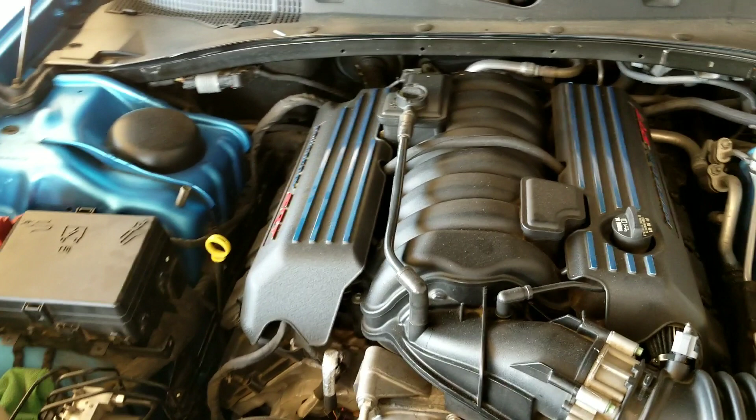Alright, so we're back at the house. Sorry, my engine's a little dirty, haven't had time to clean it.

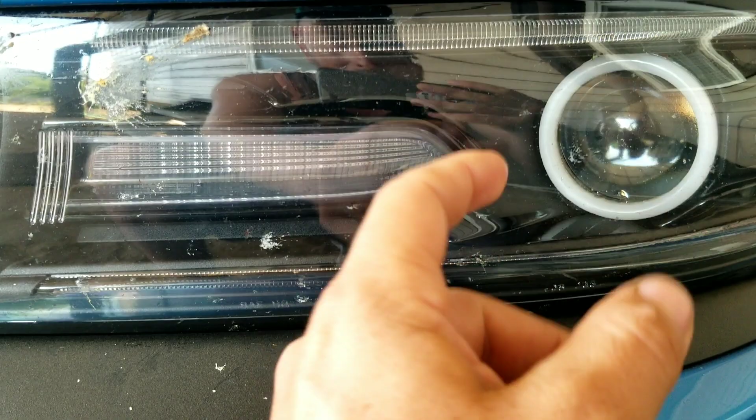This light is the driver's side HID. It just turned off - it was going on and off, then it just decided to stop. So before buying the bulbs, the HIDs, or the ballast - these are the D3S HIDs that come with a little box and light, and there's a little ballast on this side - I figured I'd check all my fuses first, check if the connectors were bad or something, or unattached and not making contact.

If you have your owner's guide, it works great. Go to the very back of the page and it tells you: front power distribution center fuse, that's that one right there. Come all the way down here, 15 and 16 - 20 amp and 20 amp, yellow, for left HID and right HID if equipped. This card comes with the HIDs too.

Either way, on the bottom of the fuse box it tells you the same thing. If you don't have your owner's manual, it tells you right here - boom, 15 and 16. You line up the box like this, it says 15 and 16 on top, that's 15 and 16. That's how you read these things, that's where all the fuses go.

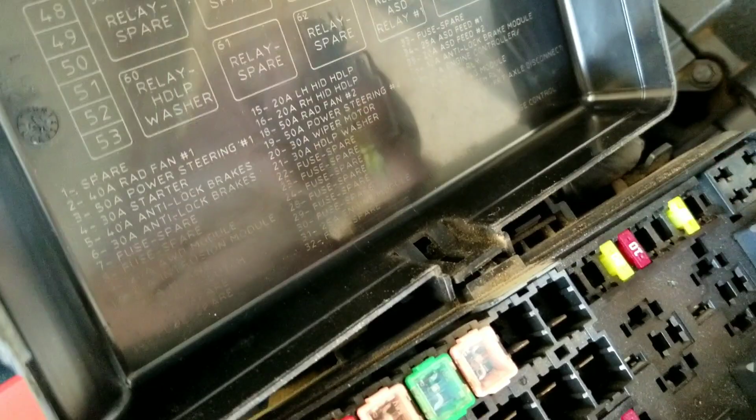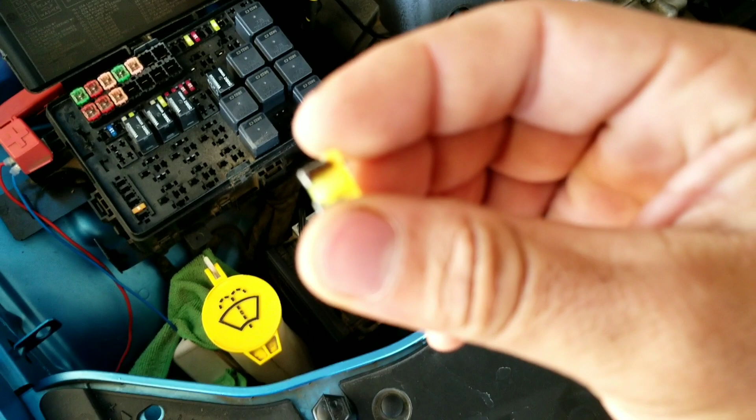So guess what I found? I came up here with the little pliers that come with it, and look at this - these things are burned. I don't know why. Look, focus - let me put it up here so you guys can see it. The fuses are burned, both the left and the right.

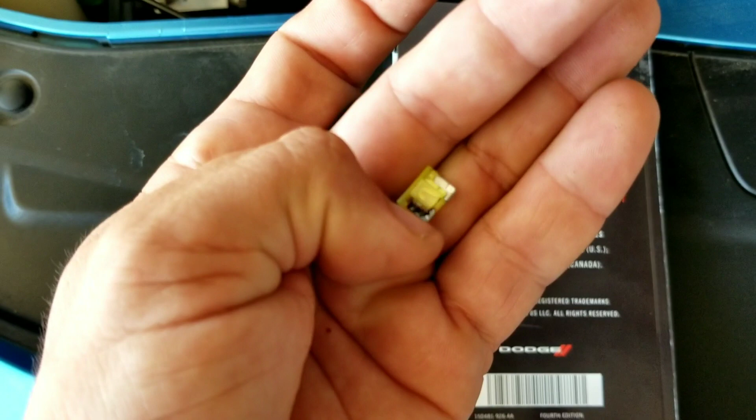Let me try to focus this thing, get it closer. It doesn't want to focus, but they're both burned. Let me get the other one - these are 20A, left and right. Look, both of them are burned.

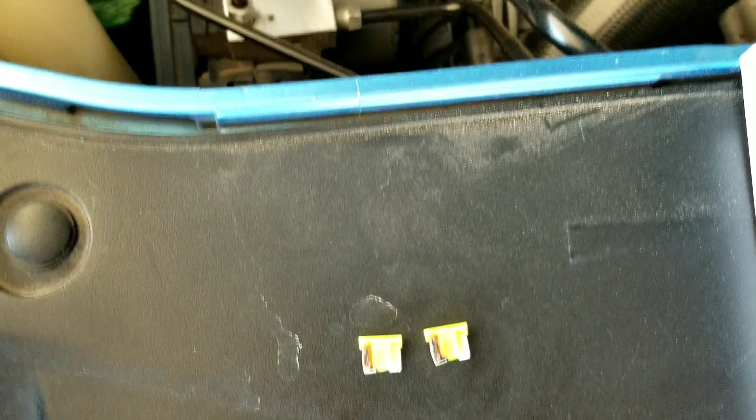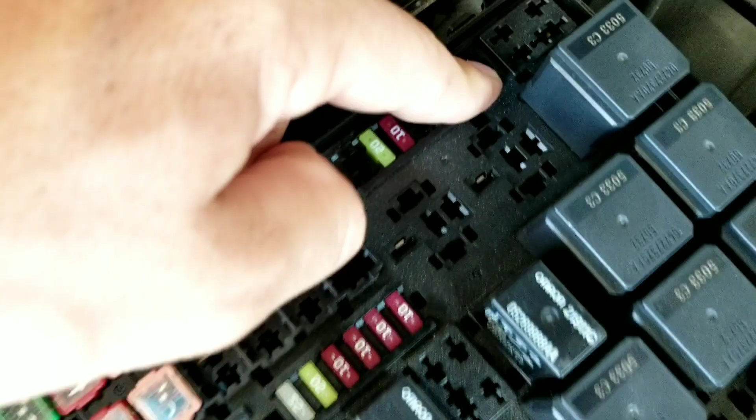I don't know what's up, I don't know if there's too much current going through here for the HIDs. But it doesn't even look burnt on the inside - I was looking at them with a flashlight and they don't look burnt inside. But these things are fucking burned, both of them. That's a concern I have - I want to take it back to the dealer and see what they tell me, because both are burned.

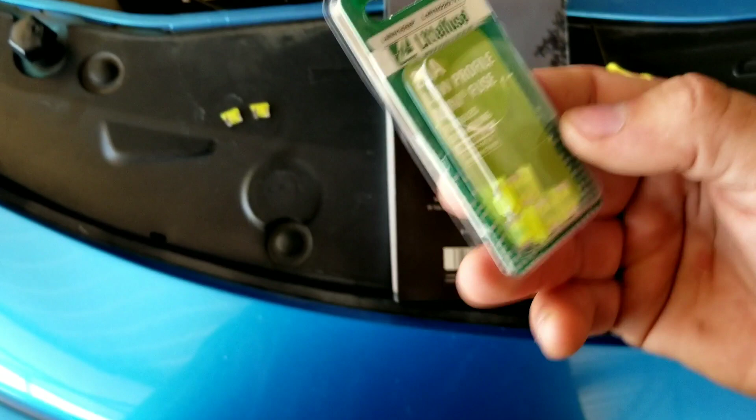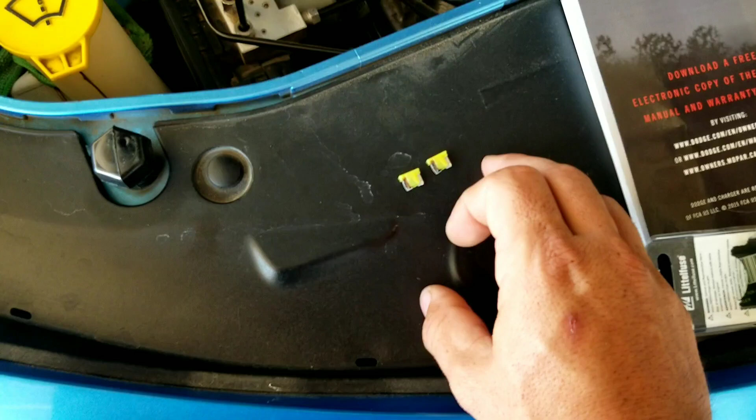For the meantime, I went to O'Reilly's and got some extra fuses for $2. We're gonna replace those and see if it turns on again. Remember, 15 and 16 are on the very back side up here, 20 and 20. There's the other one. These things are burned as hell, pretty damn bad - I'll put a close-up picture at the end of the video if you guys want to see that.

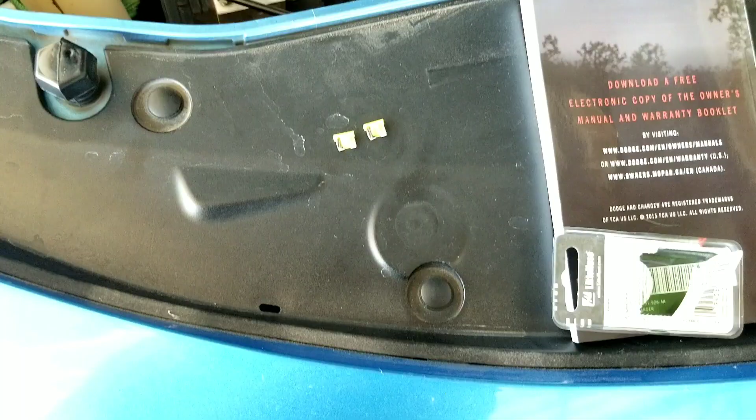But where are my keys? Okay, let's see if it works now. There we go, it's working. Before, just this one would turn on and the other wouldn't - just in cold starts it would turn on then back off, that's it. Let's try it on the inside, turn them off by the automatic thing. These are for the fog lights, these are for the running lights in the daytime.

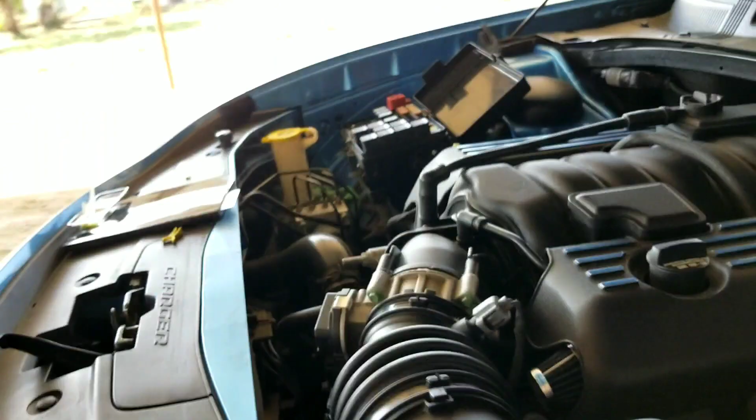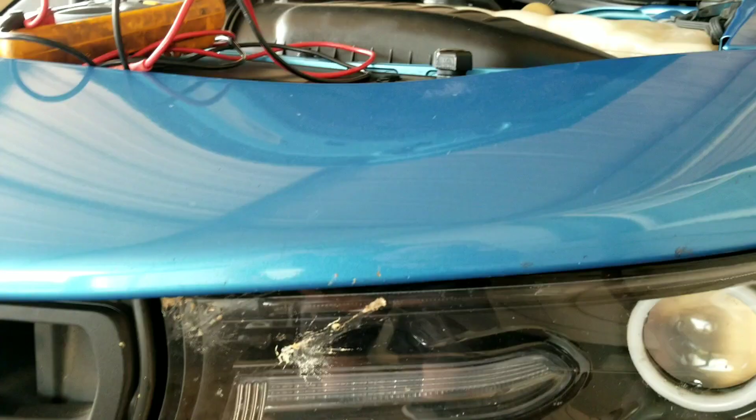Yep. If everybody else is having this issue with your HID lights or the original ones that come with them - I think it's the same for the RT, 5.7, and 392, the Hellcats, Challengers, whatever - it's gonna be the same thing. If you guys are having this problem, come check your fuse box right up here, 15 and 16, used for the left and right HIDs. Check your fuse box on the bottom if you don't have your owner's manual, but these are very helpful if you know how to read them.